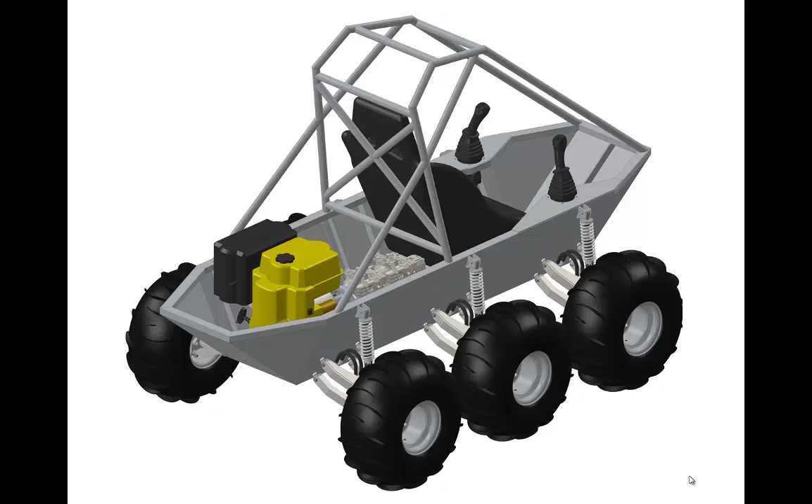In this video I will show you how to create this sheet metal undercarriage. We're going to be using the sheet metal module in SolidWorks, and notice all of these details that will help us create this sheet metal part correctly. Notice also that those edges are ripped, and that's typical for each corner, and all the other edges are bends.

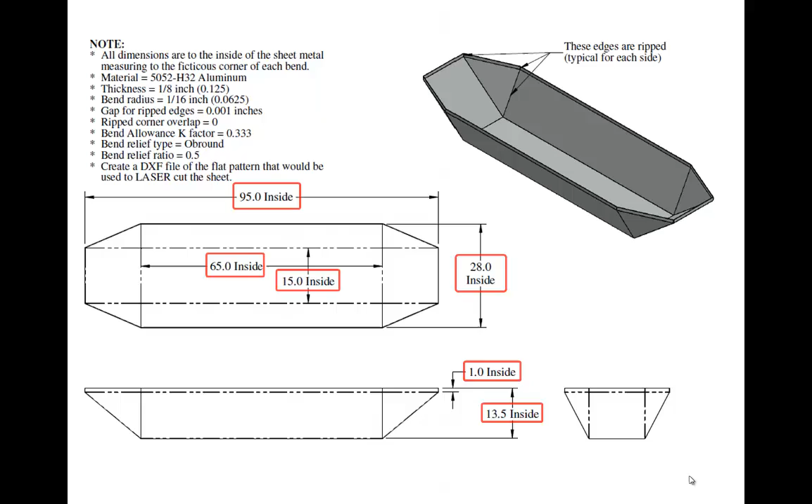Notice also that each of these dimensions are inside dimensions, to the inside of the sheet metal rather than to the outside edge. In the end, we'll be creating a flat pattern, and we'll create a DXF file of that flat pattern that we could use to send to a laser cutter.

And notice also that the material is 5052 H32 aluminum. That's the most common type of aluminum for sheet metal applications, because when we bend it, it won't crack and break. In SolidWorks, the first thing I'll do is choose New and select the part template.

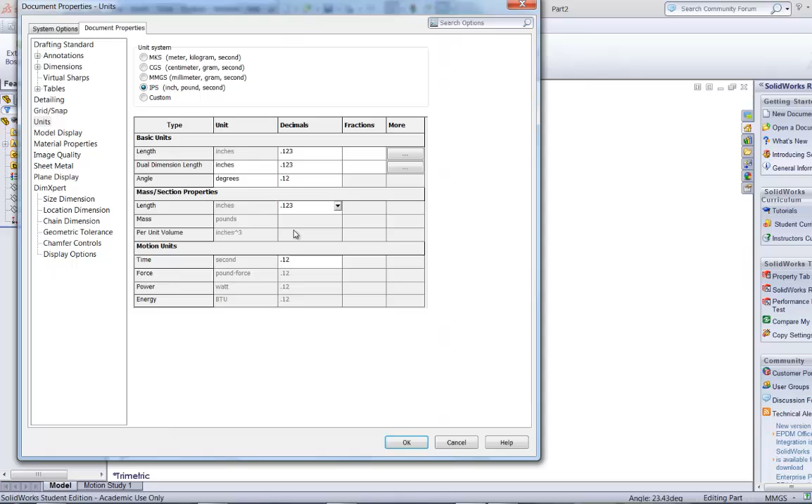And once that's up, I can make sure that I am in IPS units, and I usually like to show 3 decimals of precision when I'm in inch units. And before we forget, let's change the default material from plain carbon steel to aluminum 5052 H32. Okay, now the first thing I'm going to do is on this right plane create a new sketch.

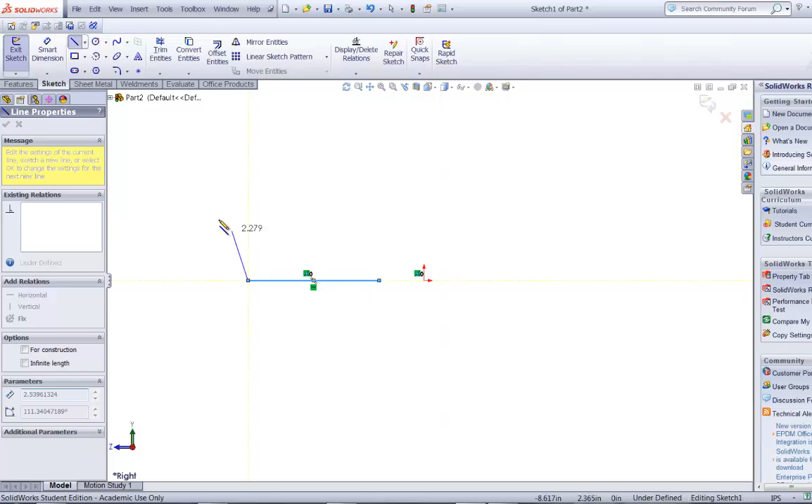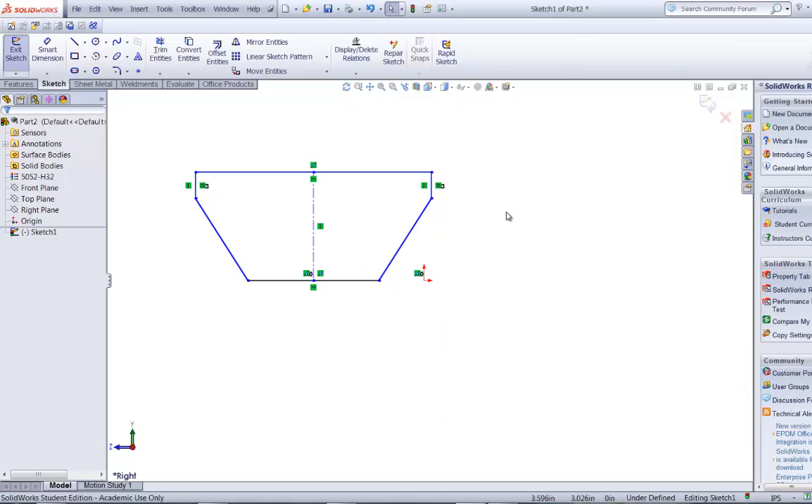We'll go ahead and sketch the general cross section of this undercarriage. We want to capture some symmetry, so I'm going to draw a center line from midpoint to midpoint, and I'll make this center line vertical. I'll also take this line and make them equal in length. Now I've captured some symmetry here. Notice as I drag it in and out, I've captured symmetry. I'll also take this point and put it right on the origin.

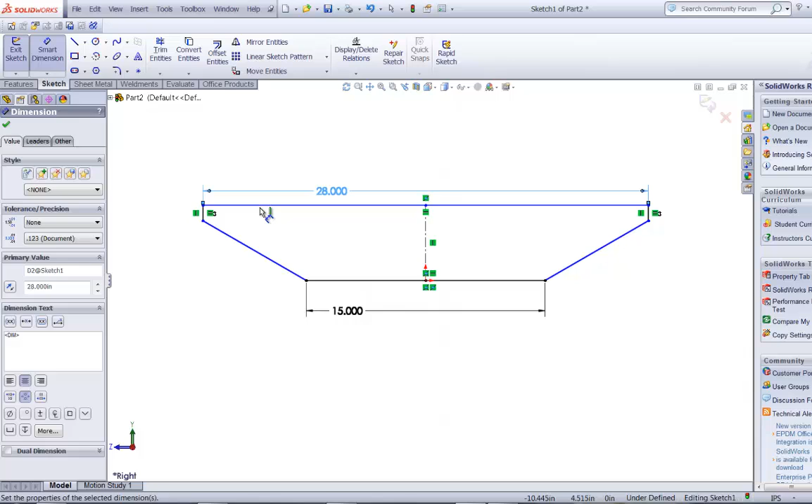And let's go ahead and put some dimensions now. This needs to be 15 inches wide at the bottom and 28 inches wide at the top. It needs to be 13.5 inches tall, and this needs to be 1 inch tall. And we'll finish that sketch, and we can create an extrusion. Now we'll extrude in both directions to a total distance of 95 inches.

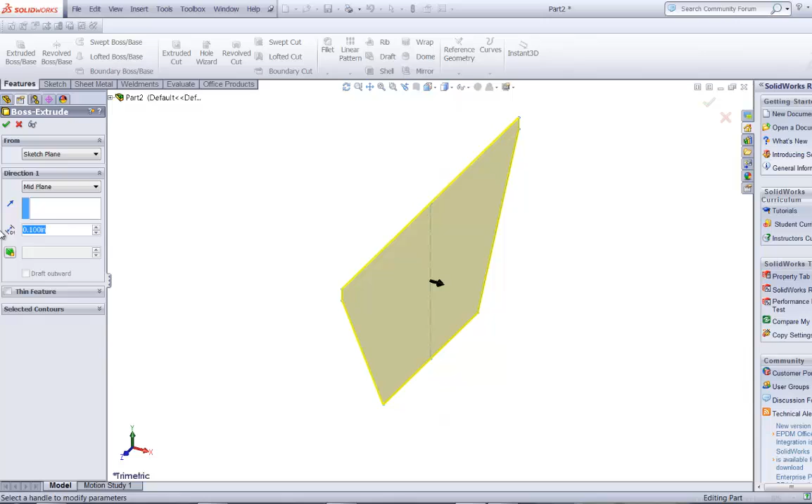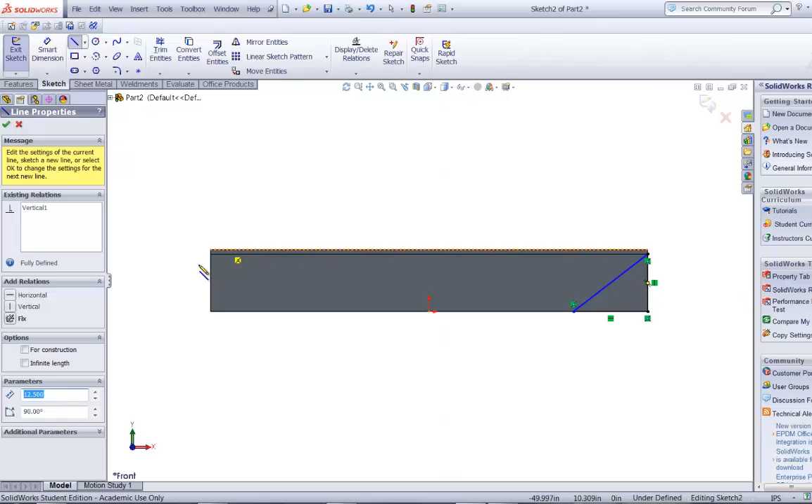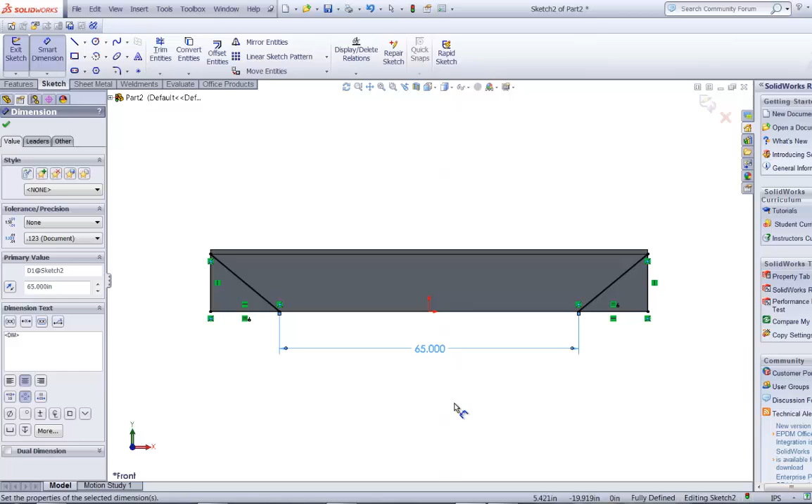Now we can create a sketch on this front plane, new sketch, and let's reorient it so that we're looking at that sketch plane straight on. And we'll draw a triangle from here to here, over to here, and up to here. We'll do the same thing here, triangle here. And let's make this length and this length equal so that we have some symmetry. And we'll give this dimension 65 inches. Notice everything's black, we're fully defined, we can finish this sketch.

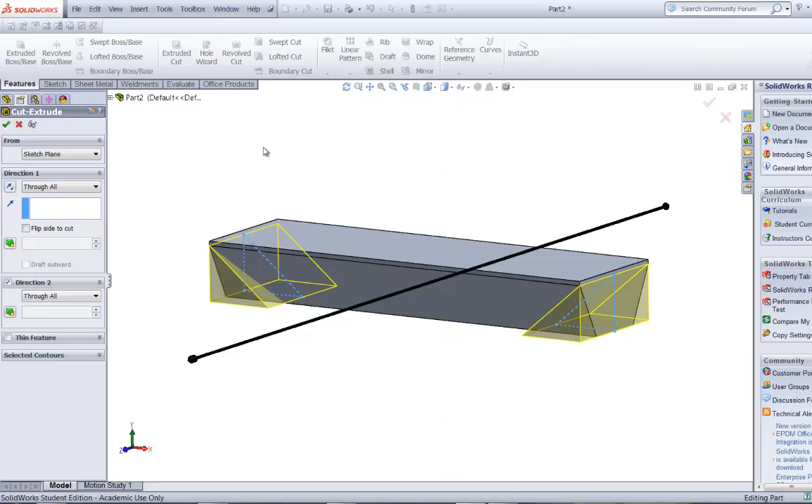Now let's create an extruded cut. We want to extrude through all in that direction, and we'll choose direction number 2 and go through all in that direction as well. So our sketch is at the mid plane, and we're going one direction through all and also the other direction through all. We choose OK. So now we have that beveled face, but we still need this 3-dimensional beveled face, and there's some interesting complex things going on here.

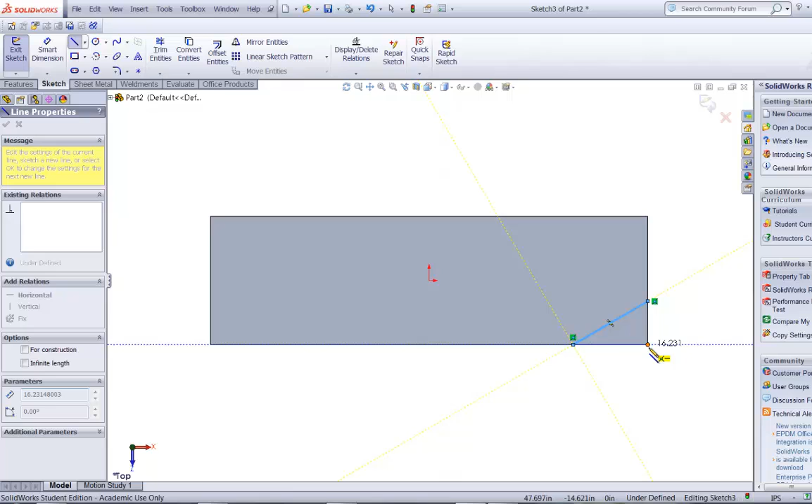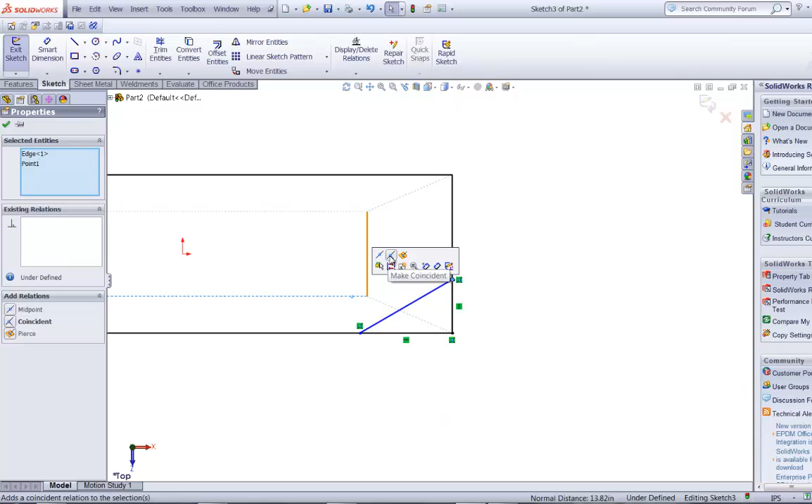So let's create a new 2-dimensional sketch on that top surface. Orient that straight on, and we'll draw a triangle right here. Now this corner of the triangle needs to be in line with the bottom, so I'm going to change the way I'm viewing this. Instead of viewing it shaded, I'll view it so I can see hidden lines. And this point actually needs to be in line with that hidden line that's representing the bottom of the part. Let's make that in line. We'll take this one and make it in line with this bottom edge.

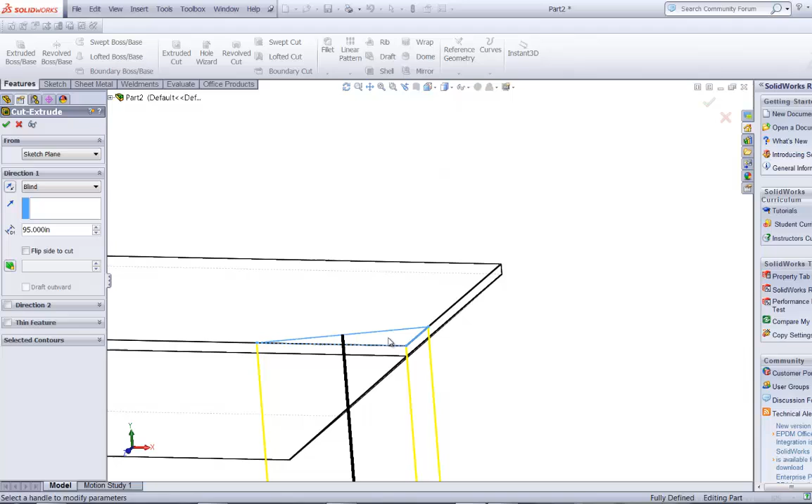Now you'll notice that I'm underdefined because I accidentally created some little stray line here. I'll go ahead and delete that. Now I'm fully defined in this sketch, so I can finish the sketch, and let's create a cut extrude. And I want to extrude downward by 1 inch. And let's change the way we view to see this shaded. So notice I've just clipped that little top corner down to here, but now I need to create another cut extrude that's this sloped 3-dimensional face.

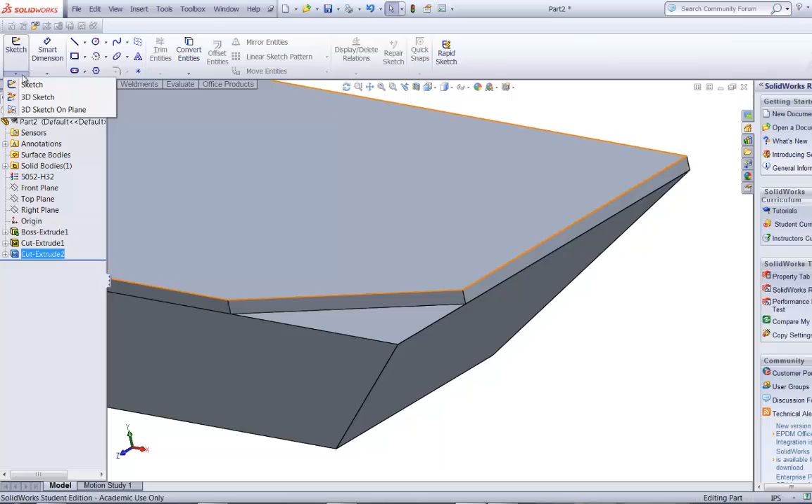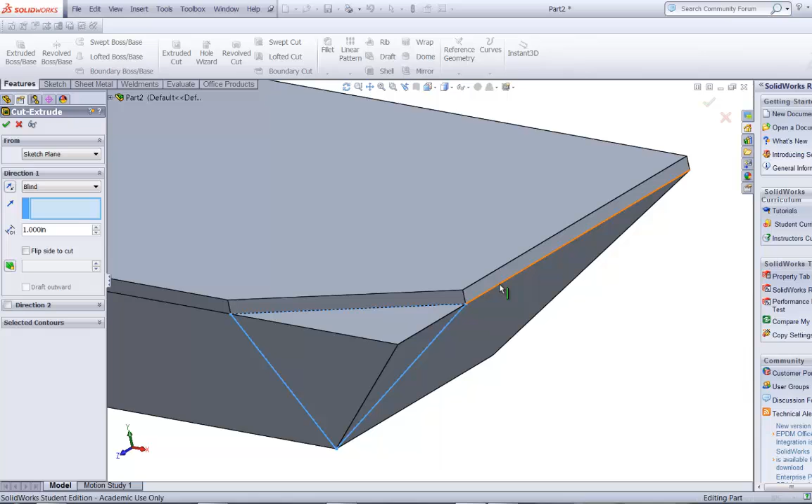I'm going to do that by coming to the sketch and creating not a 2-dimensional sketch, but a 3-dimensional sketch. We'll draw a line from this corner down to this corner, up to this corner, and over to this corner. That sketch is now fully defined, so I can finish it. And I'm going to create an extruded cut of that three-dimensional sketch. Because it's a three-dimensional sketch, I need to specify the direction to extrude. So I'll choose this edge, notice it's extruding this way, and I want to go through all, and choose OK. Now I have that sloped face.

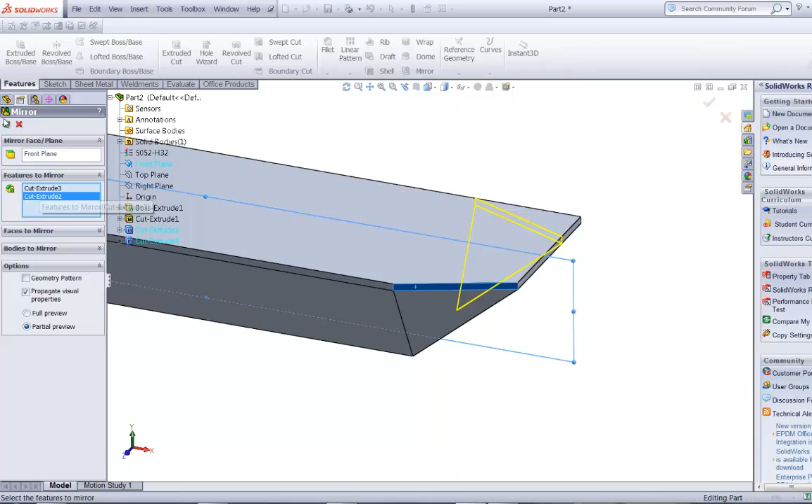Now I'm ready to mirror about this front plane, not only this sloped cut extrude, but also this cut extrude. So I'm mirroring these two features, cut extrude 2 and 3. Choose OK. And notice across this side I now have that beveled corner. Now we can do another mirror command. We're going to mirror across this right plane, and notice what we've selected to mirror.

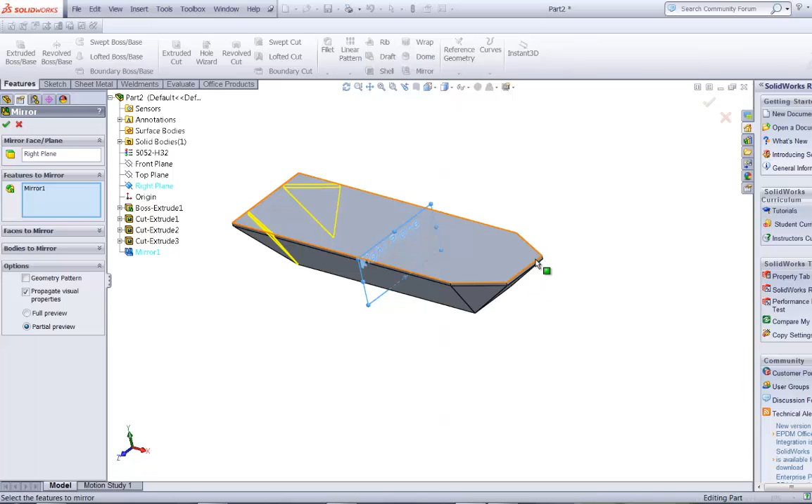We're actually mirroring the mirror feature. So this feature was mirrored to here, and now we're mirroring that mirror feature across this right plane, and choose OK. So now we have the bevel on all four corners.

But you might be saying, hey, but that's not a sheet metal part, that's just one solid part, and that's correct. So now let's go to our sheet metal tab, and if you don't have the sheet metal tab, you just right click here and you can add new toolbar tabs. We have the sheet metal tab already added, so let's go to the sheet metal tab, and one of the tools is to convert a solid to a sheet metal part. So let's use that tool, convert to sheet metal.

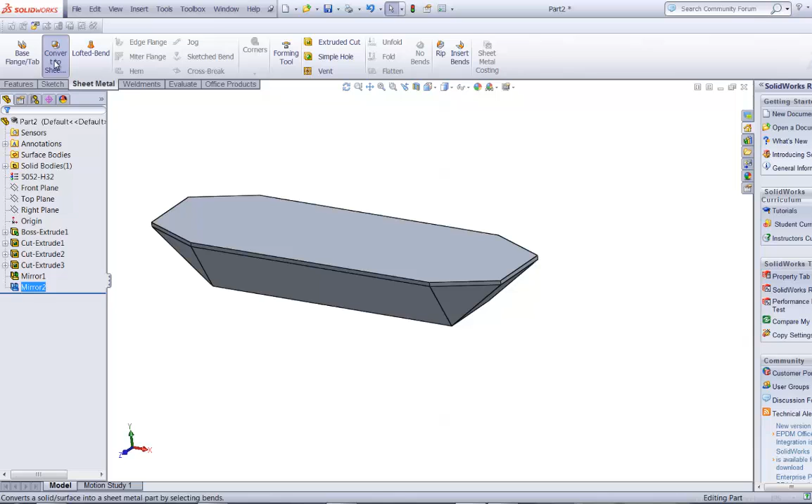The first thing that needs to happen is I need to select the base face for the sheet metal. So I'm going to choose this bottom face, and now I can start choosing edges that need to be bent, and it'll try and calculate the ripped edges as well. But actually, before I start choosing bent edges and ripped edges, let's go ahead and specify all the sheet metal parameters to make sure we got it right.

We want 1/8 inch thick sheet, we want a 1/16 of an inch bend radius. Let's go ahead and collapse these for a minute. Let's look at the corner defaults. We want a gap for the ripped edges to be 1/1000th of an inch, and the ripped corner overlap needs to be just 0 inches. We don't want any overlap.

The K factor is what is used in determining the flat pattern, and when we have sharp bends with a very small radius, the K factor ought to be about 1/3. We'll put 0.333 in. And the bend relief, let's use an oblong bend relief of 50% or 0.5.

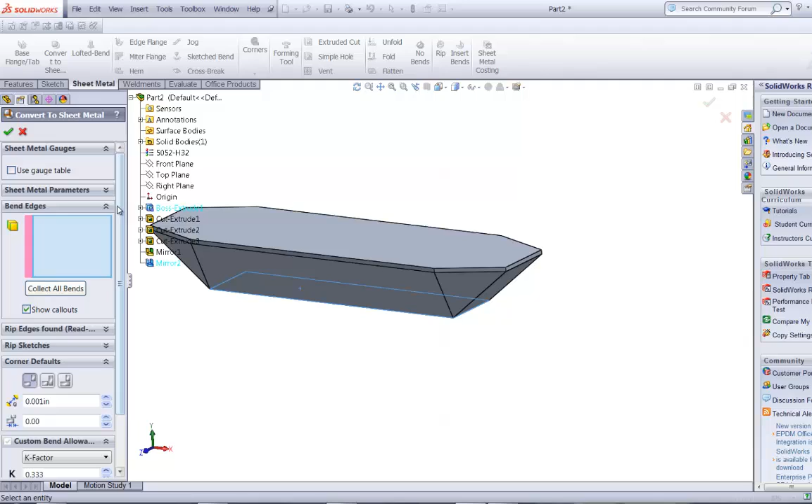Now we can go ahead and start selecting some bend edges. We know that this edge right here is a sheet metal bend, so is this edge here. That's a bend. This is a bend. This is also a bend. We know this is a bend, and this is a bend. This is a bend, and these are all bent edges.

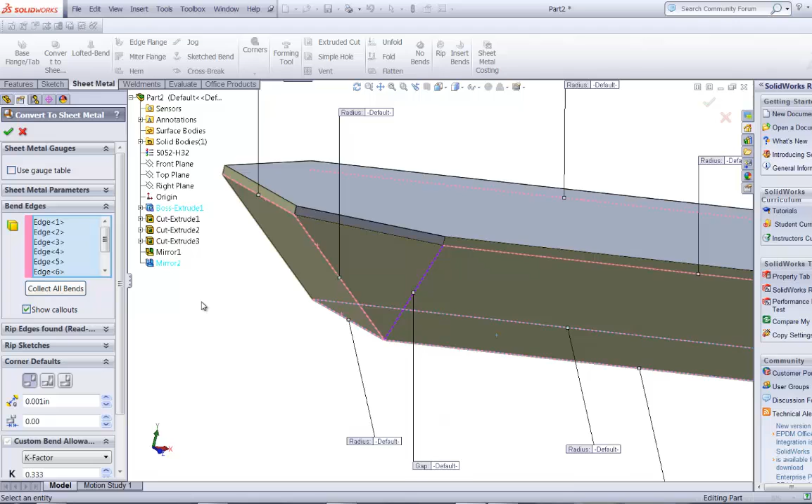Now we also know that this edge is bent, and notice when I bend this edge, this one can't possibly be a bend, so it created that as a ripped edge. Notice it's purple rather than pink. This edge also needs to be a bent edge, which creates this edge, purple, which is a ripped edge.

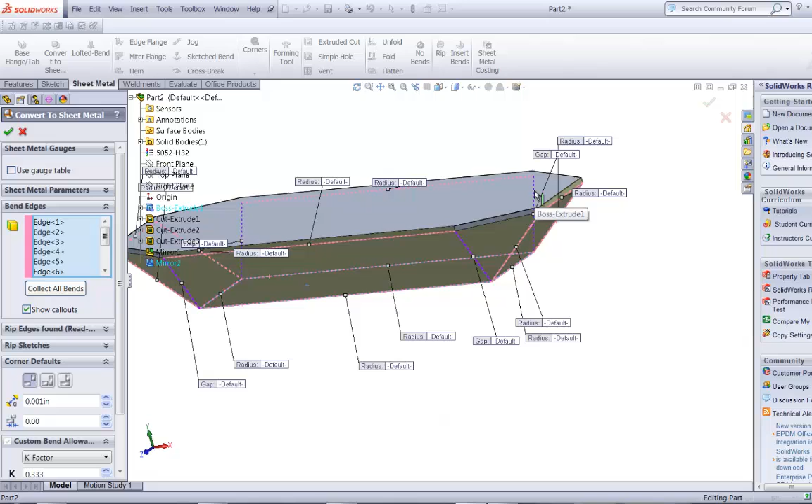This edge needs to be bent, which creates that one automatically a ripped edge with a gap. And this edge needs to be bent, which will create that as a ripped edge. Now I know that this needs to be a bent edge, which will automatically have to rip both of those with a gap. And so we'll do that here as well. Here, and here.

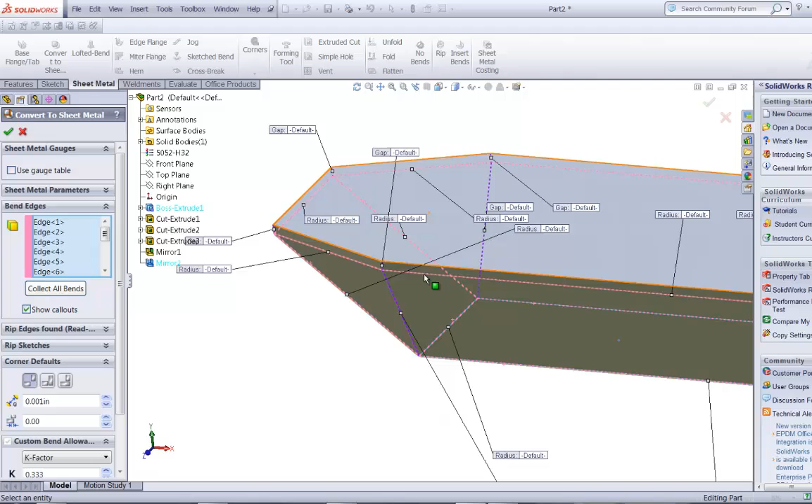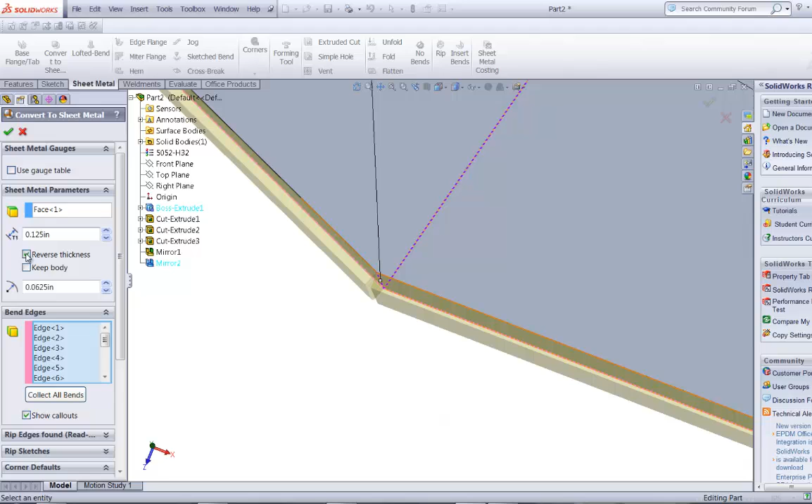Now the next thing I need to do is make sure that the sheet metal is going outward rather than inward, because remember all of the dimensions that were provided us are inside dimensions. So let's zoom in and make sure that the sheet metal is going outward instead of inward from the edges that I've selected. And it looks like, yes it is, it's going outward. Showing this little light yellow, the sheet metal is going outward. If it was going inward instead of outward, I could always go to the sheet metal parameters and reverse the thickness. Now we'll choose OK.

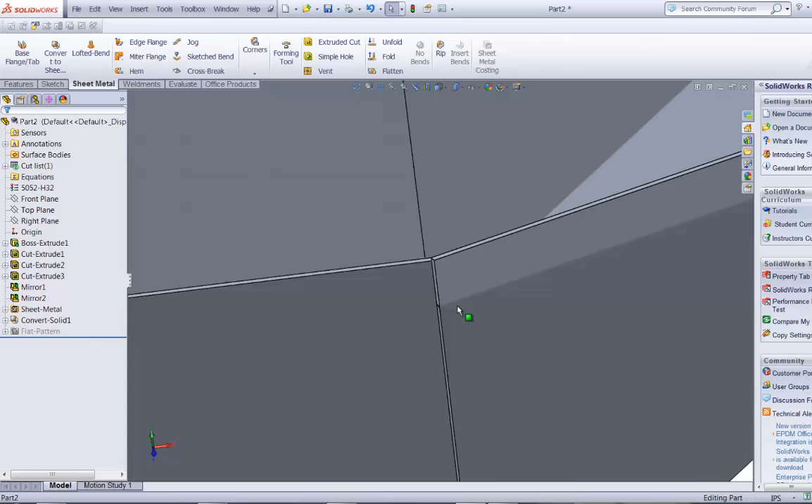Notice what's happened. It's created a sheet metal piece from that big solid piece. And we look in and we say that yes, it did rip the right edges, and we have some bend relief. We can take a look at these edges. We can make sure we have some bend relief down here, and that's just correct. That's exactly how we want it. So this is now our sheet metal part.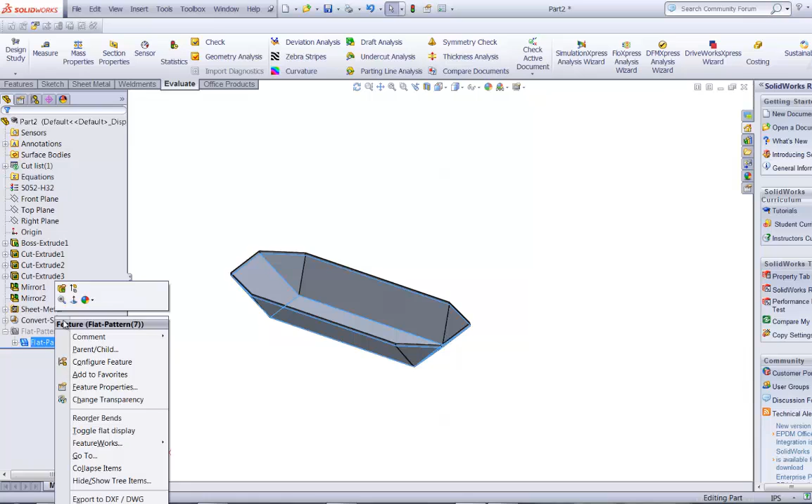Now we could find out how much this part weighs by going to the mass properties. We can also find out some information on the flat pattern. Here's a folder. If I click the plus sign there, it shows that I have a flat pattern. I can right click and unsuppress the flat pattern, and it'll show me what this part would look like before it was bent.

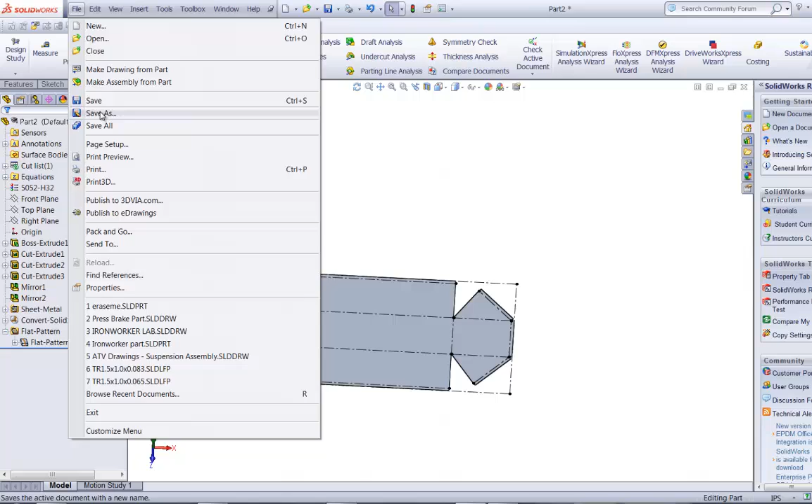So I could have a laser cutter cut this part out, and then I could go to our press brake and bend it. But a laser cutter usually only reads DXF files, and this is a SOLIDWORKS file. So let's go here and we'll do a save as, and we'll save this as a DXF file. And notice it wants to know what I want to save as a DXF file. I could specify the sheet metal and choose OK.

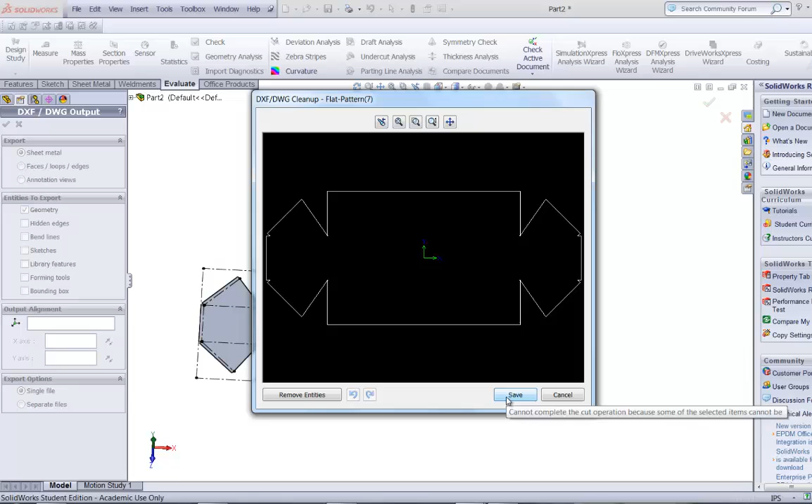And it shows me a preview of what that DXF file will look like. And it looks correct. And when I hit save here, that's a file I could email to a shop that has a laser cutter, and they could cut that flat sheet out, and I could then bend it to the right shape.